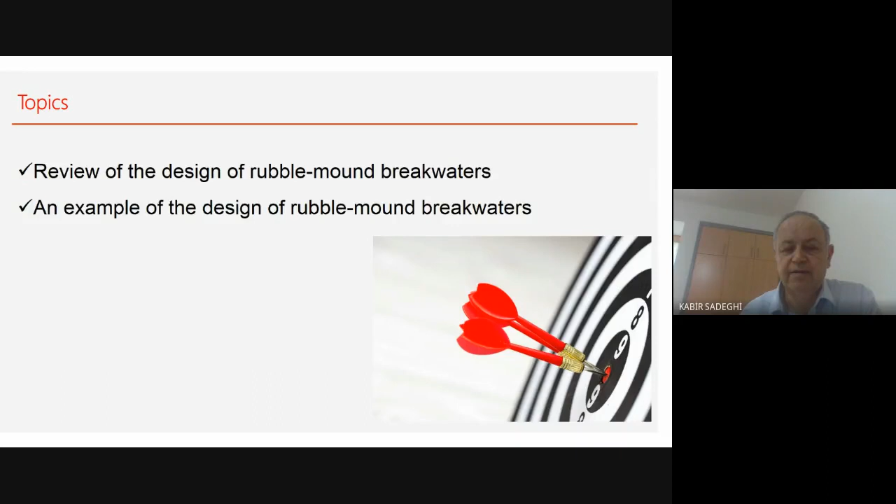First, let's see the overview. As I mentioned, the Rubble-Mound structures or Rubble-Mound breakwaters are the most commonly used breakwaters, and because of that, we see the design of this type of breakwater in this course. We had, for example, the conventional Rubble-Mound breakwaters that we are reviewing now, and there is another method that is berm breakwater, or that's formed by the waves. That's a new approach given by Professor Van der Meer. It's something about perhaps 25 years that this other method was offered. Therefore, we focus here on the conventional Rubble-Mound breakwater design.

The conventional Rubble-Mound breakwater consists of a core, which has a large volume, and at least a filter layer, and also an armor layer. The armor layer protects the breakwater against the wave. The role of the filter is to protect the core from being washed or scoured by the wave through the armor layer. The material of the armor layer is the biggest size, and the filter layer material size is bigger than the core but less than the armor layer.

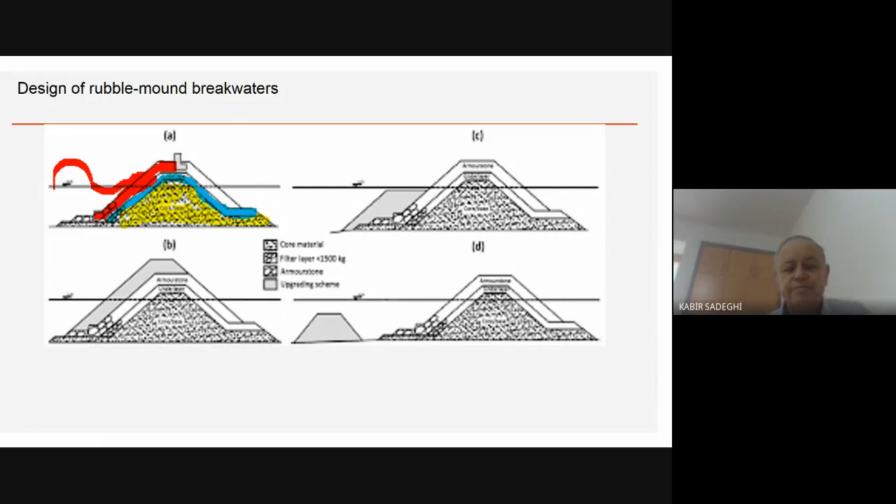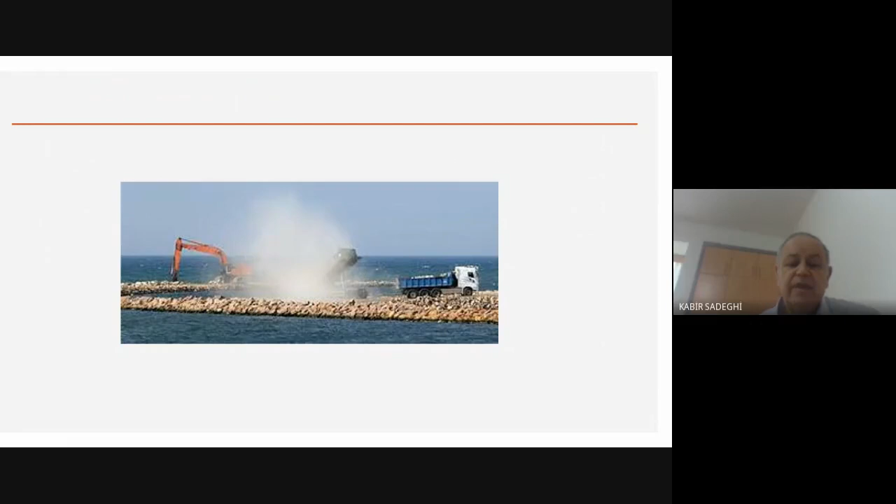Here in this slide we see how they construct the breakwater from land. They use dump trucks and cranes and grabs to handle, transport, and place the armor layer, the filter layer, and dump the core material by dump truck.

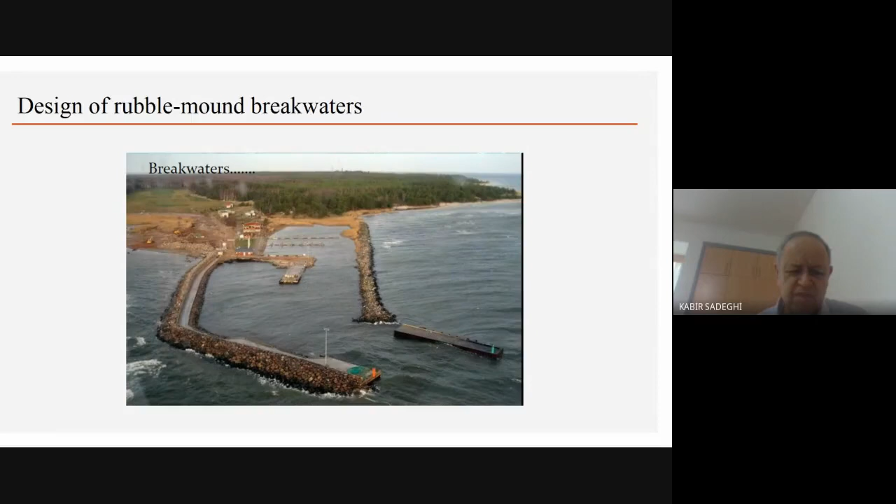Here you see the plan of a small harbor that uses the Rubble-Mound Breakwater structure type. For example, here you see the armors, they are made of stone. Here you see some other armor type, which is concrete, and it is tetrapod.

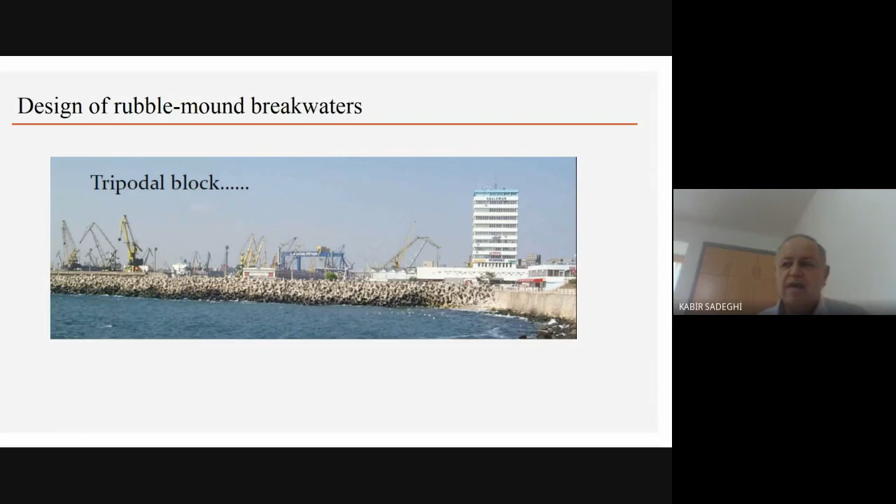Now we go to see the design of the Rubble-Mound Breakwater. For the design, we use the Hudson formula. The Hudson formula is an old formula, proposed perhaps more than, I would say, 70 years ago. They modified it a little, but actually the main skeleton of it is still there.

In this formula, we calculate W, which is the weight of the unit armor. And in this formula, we use WR, the unit weight of the armor layer. If it's stone, it's something between 2 to 3. If it's concrete, it's something between about 2.4 to 2.5.

Again, the most important parameter is the wave height. We have different wave height categories. For example, we have significant wave height, we say H1/3 or H33%. Previously, they applied significant wave height here, and then I think it's more than 20 years that the code was changed and they apply H10%, using a bigger wave height.

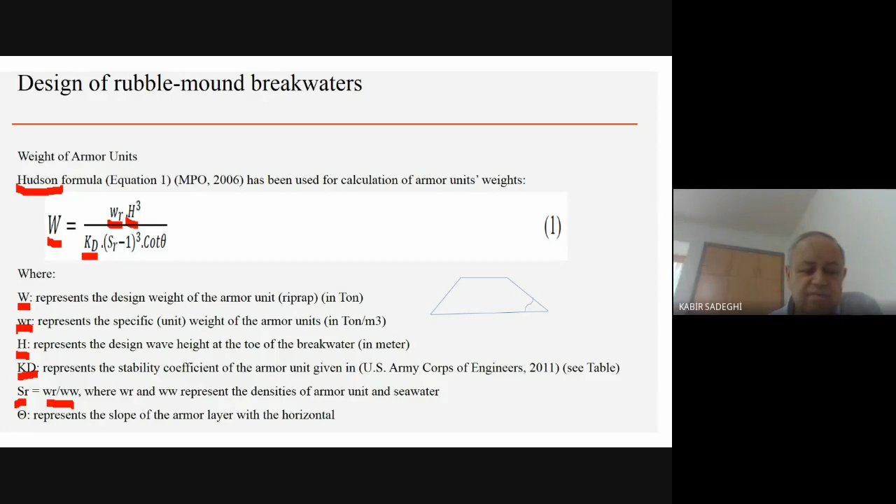And there is theta. Theta is the angle of the slope section of the armor layer. Let me show you in another slide. Yes, here if I show you, theta is this angle, the angle between the armor layer and horizontal.

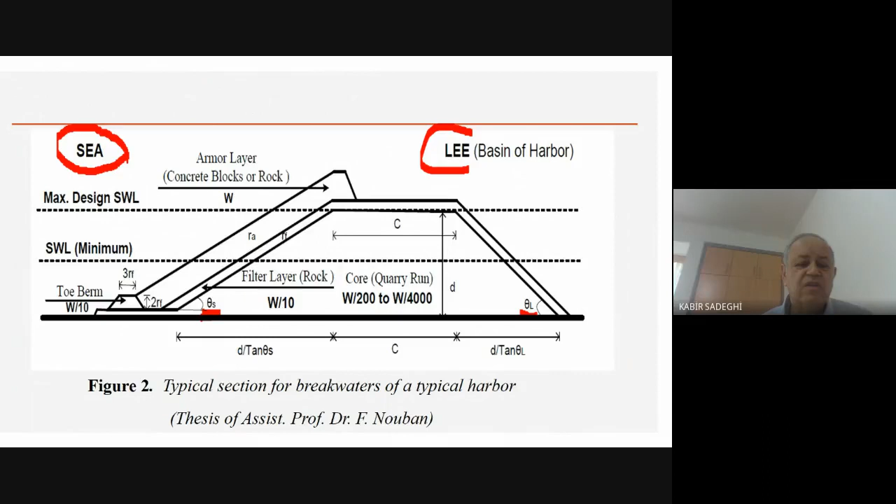And on the other side, we have the lee side, when this is the harbor side or lee side. The other one is the sea side, facing the sea. Therefore, we have lee side and sea side. You see that on the side of the sea, or seaside, we need armor. But on the side of the lee, we don't need armor, a filter may be enough. Therefore, we'll see later how we design that.

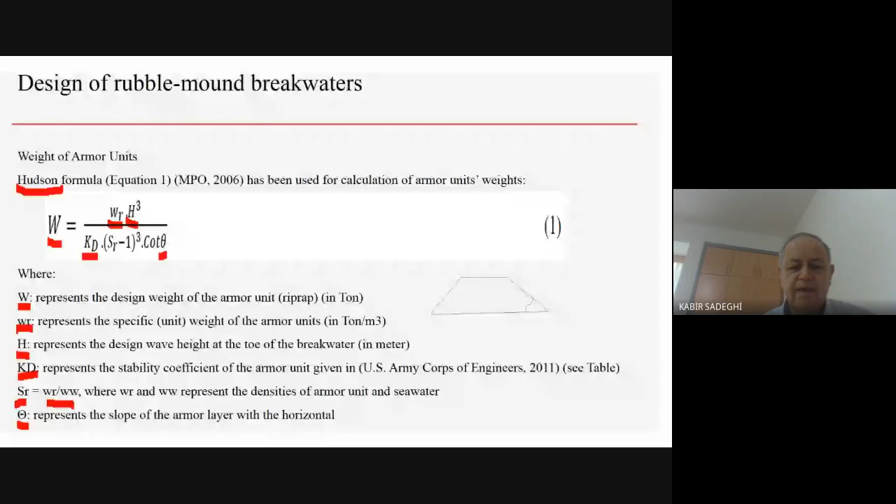Now let's see what is KD. KD is given by the US Army Corps of Engineers, and this is summarized here, based on different tests.

You see the first column, the armor units are listed: different things. We have quarry stone, tetrapod, quadrupod, tribar, Dolos, modified cube, hexapod, and many other different models.

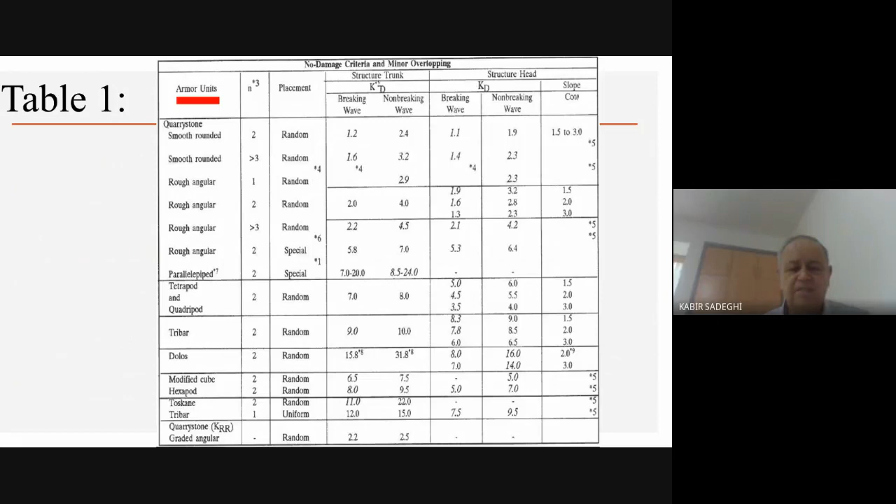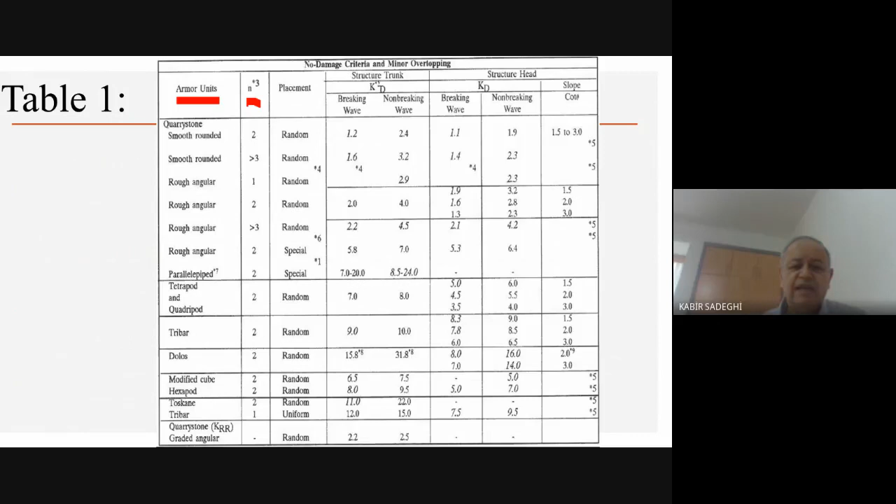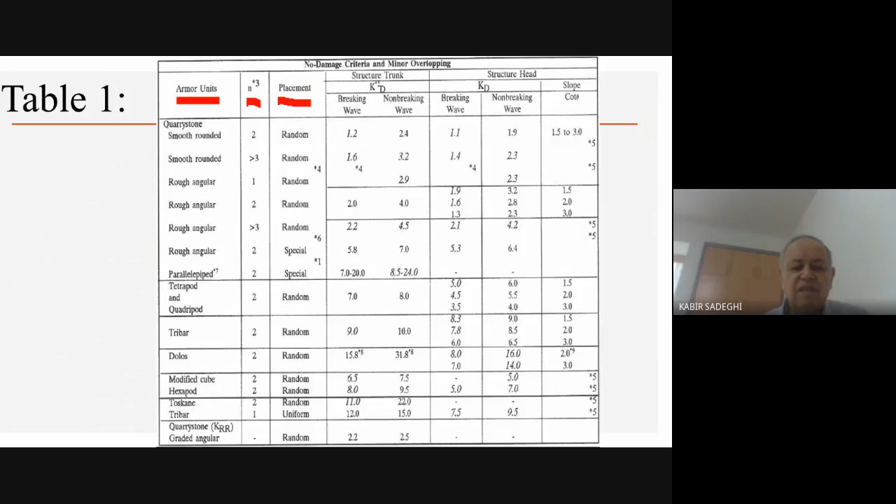The second column shows the number of layers. How many layers do we have? For example, in the armor layer, perhaps we have 2 layers; in the filter, perhaps 2 or 3. We can change the size of them as well. Then there's how they are placed - randomly or specially placed. It depends.

You see we have 2 different columns here, one from here to here, and the other from here to here. What's the difference? The first one gives values for the trunk of the breakwater, the second gives values for the head of the breakwater. The head should be heavier and stronger, because sections in the trunk are supported by other sections, but the head is supported by nothing. After the head we have water, and this is subjected to very strong waves.

You see here the last column - for different tests they use different slopes or angles. Cotangent theta is the slope, and theta is the angle we discussed. For example, for rough angular stone we have 1, 2, 3 different slopes, and the results are given. For tribar, everything, different slopes are given here.

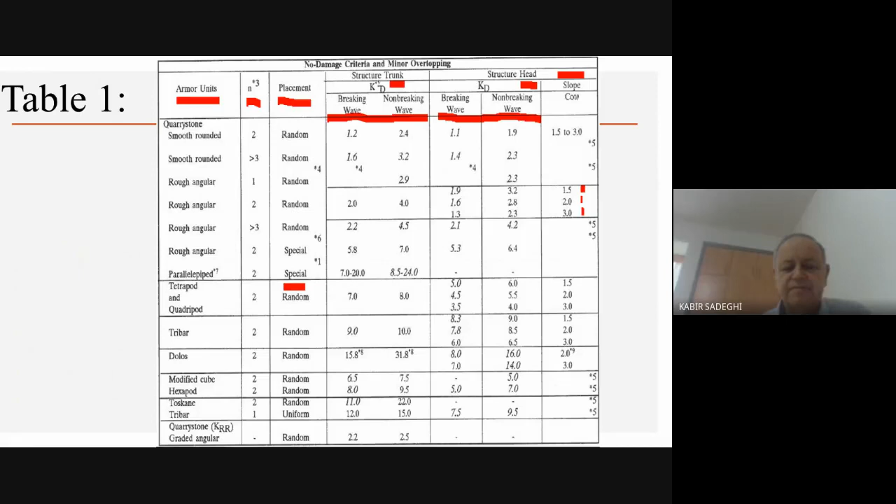We saw that we have different types of armor units. The KD of Dolos is very high, very good and used. We have tetrapod, which is common to use. We have tribar, common to use. We have modified cube and other types.

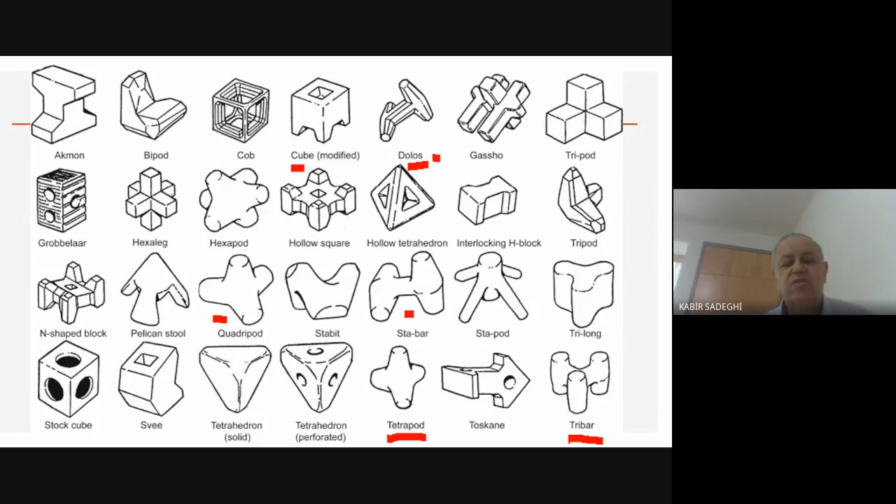Here we have quadrupod, and Sta-bar has a very close shape to the Dolos. There are some famous types, and there are not - why are they different types? Because if you want to use them, you should pay the patent fee. Some people prefer to use their own, or they generate more and get a patent.

Now let's see the overall concepts and equations for design of rubble-mound breakwater. Here we see how we calculate the weights of core, filter layer, and armor layer. All these values are given according to the recommendation of the US Army Coastal Engineering Center. We have SPM, the Shore Protection Manual, and more publications from there. You can search the internet, buy some of them, download some, and use them.

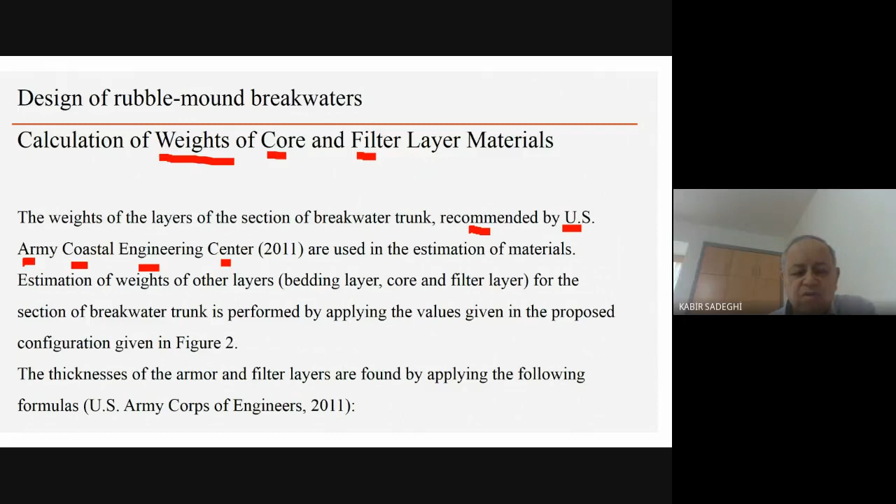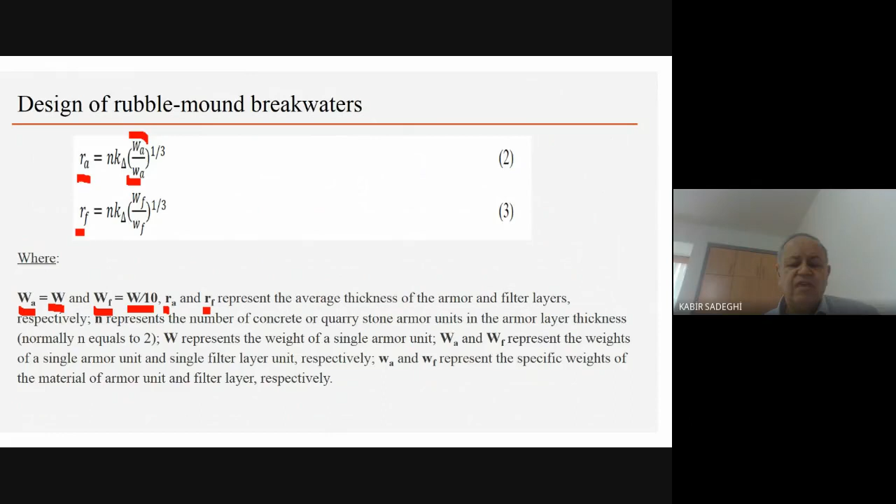We calculate all of these values and sketch the section of the breakwater. This is a typical section of a breakwater used for harbors. This special sketch, with the slopes and details, is given by Professor Dr. Nouban in his thesis - he used that and calculated the materials and a lot of things based on this section. We use that one.

It's very practical. As I mentioned, on the lee side, in the harbor, we don't have the armor layer; on the sea side we have the armor layer. A very important part that has been emphasized recently, for more than 25 years, is the berm. When you put a berm here, it stabilizes the armor layer and the breakwater overall.

The weight of the berm is W over 10, like the size of the filter layer. For the armor layer, the weight is W, shown here. For the filter layer, as recommended by the US Corps of Engineers, this is W over 10. But for the core, which is the main body of the section, it's between W over 200 to W over 4000.

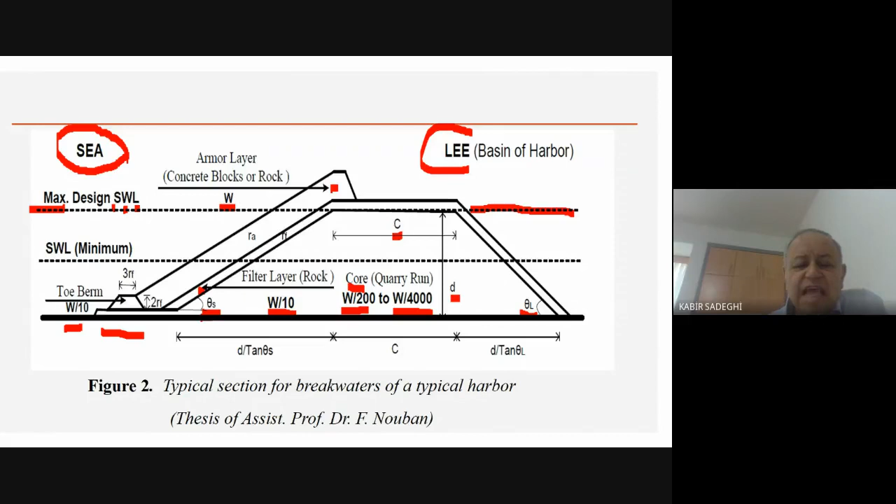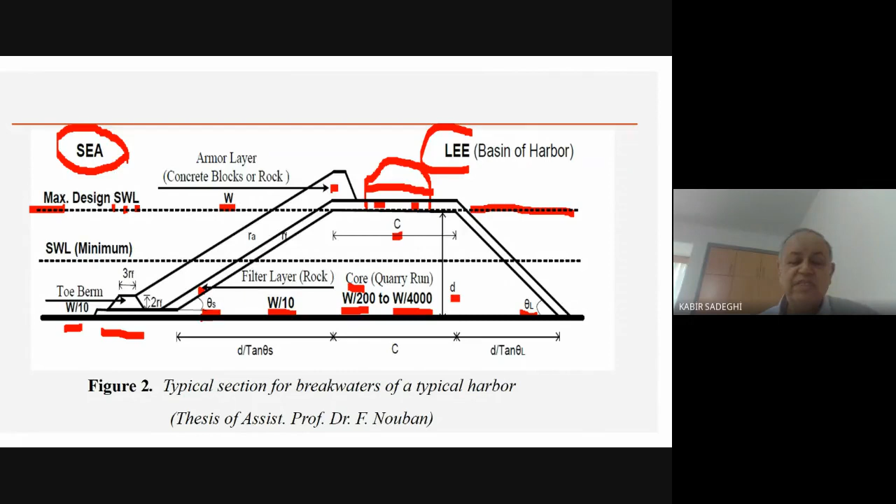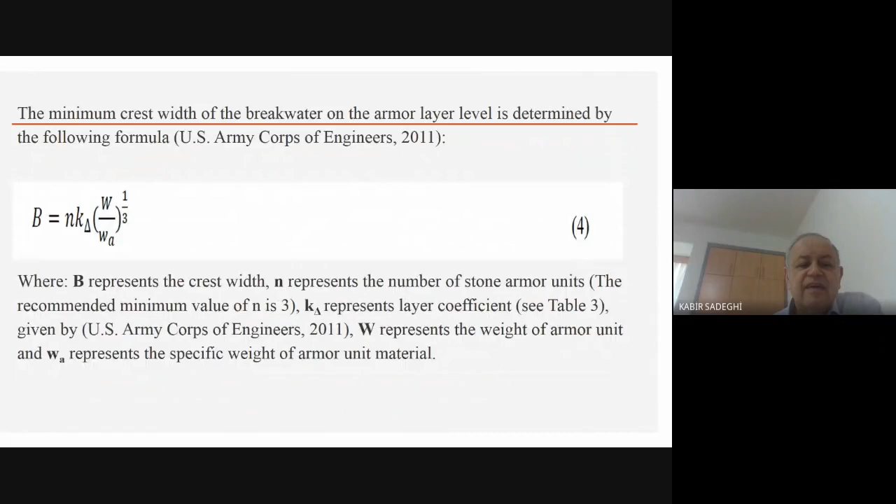The minimum crest width, as I mentioned, is shown in the figure by C, but the US Corps of Engineers give it by B. It has a formula like this: N, the number of layers in any layer, in armor or in filter, and then K delta W, this is the armor layer unit weight of 1 unit of that armor layer, total weight of 1 unit, and WA, as we discussed, is the unit weight of the material of armor. Therefore, N is the number of armor layers. Perhaps the armor layer itself has 2 layers, 3 layers, but mostly 2 layers or 1 layer.

Therefore, as I mentioned, we use K delta here, but we didn't see what K delta is. Let's see what K delta is. K delta is given in a table here. You can see the value of K delta. This is corrected, I corrected it. It was KD, I corrected it to K delta. That's correct. Therefore, it depends on the armor layer type, the first column shows that.

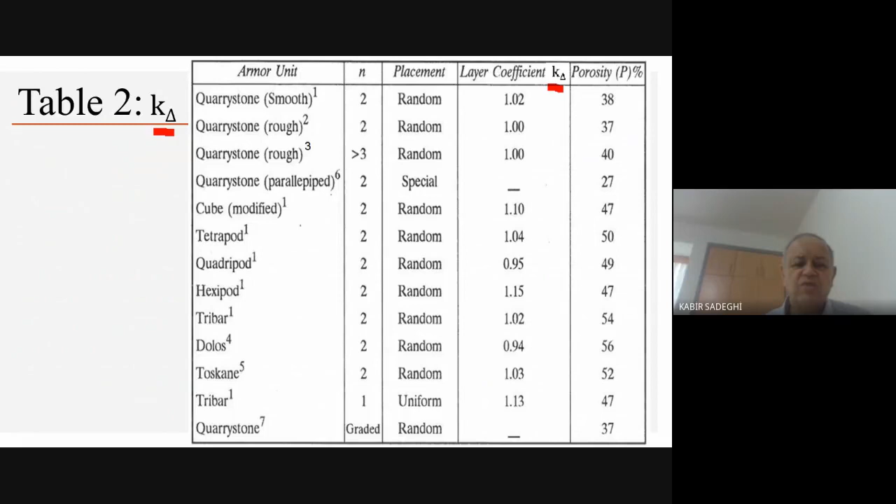As I mentioned, we have quarry stone, we have tetrapod, quadripod, hexipod, tribars, dolos, etc. And the second column gives us again the number of layers in that layer, the placement type, and finally we find K delta.

And we can find 1%, for example, for porosity of the layer. In the armor layer, you know, we have stone, but between the stones there is air, there are gaps, there are voids. It calculates how many percent void there is. Because of that, if we have the length, height, and the width, we have total volume multiplied by the percentage of this void. We see the empty part, and 100 minus 38, for example, percent gives you the full part, and you can estimate the quantity of material.

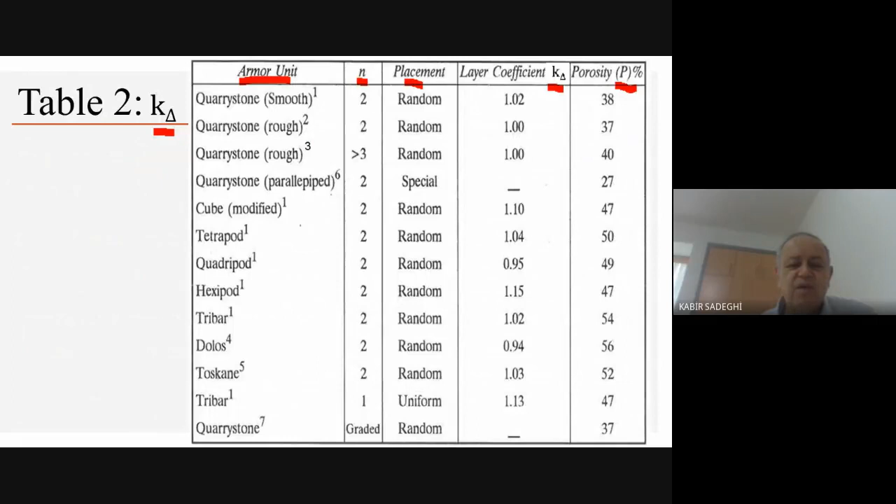In this table, you see there are some numbers, 1, 2, 3, 4, 5. These values just give some more information about who has given that data and how, etc. It's listed here.

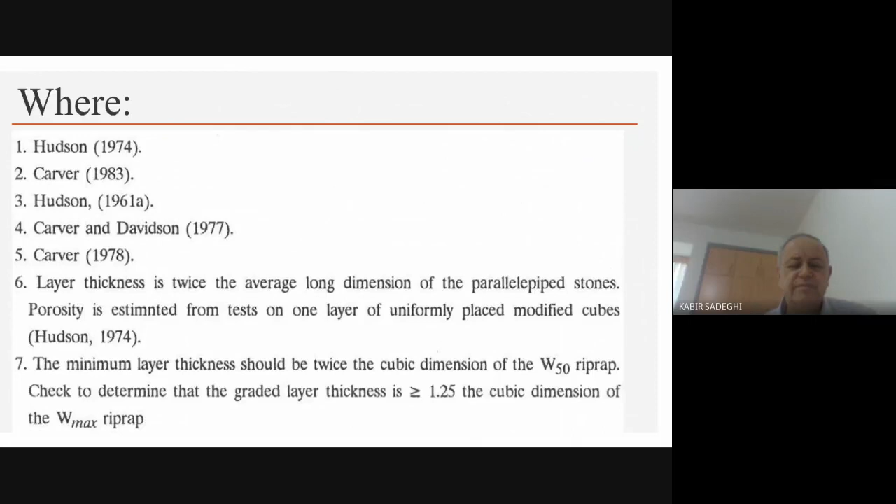Actually, we accept that in the normal case, up to 5% damage, we accept that. During the operation period, we repair that. For example, one wave comes after 10 years and moves some stones or armors, concrete armors, everything, we can replace that, we can repair that. Sometimes at the beginning of a project, we don't have a lot of money. You say okay, we don't have money, let's apply smaller sizes of armor. And if there is damage, we repair during the years, 1 year, 2 years, everything, we change some of them.

Some breakwaters even have permanent repairment. They change this, a wave comes and destroys another part and then it's replaced, because they divide the budget in two parts, one at the beginning, one in the operation period. If you put a big budget at the beginning, you need less repair and less budget for repairing. Inversely, if you put a lesser budget, you need more repairing budget later. Actually it depends on you.

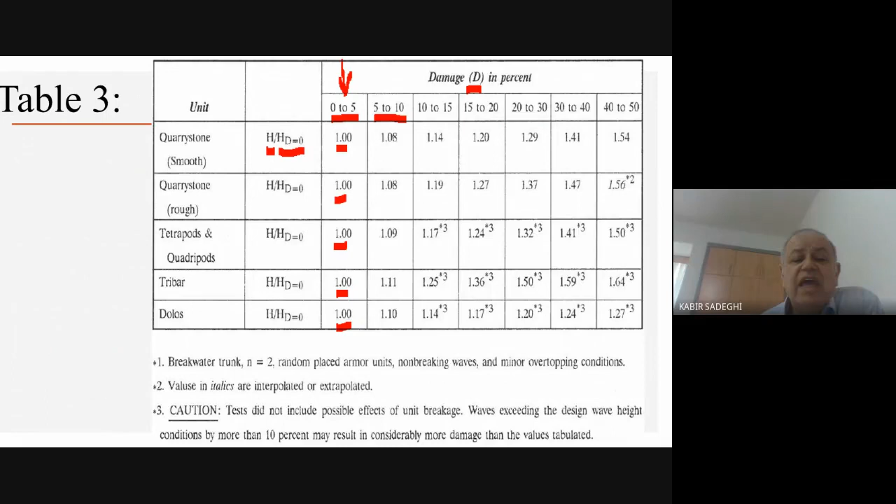Okay, if we accept 5 to 10% damage, we calculate H over HD, which gives 1.08. Therefore, if your H was 5 meters, using 1.08, you find what is HD. Perhaps it's 4.8, I don't know. We have one example, we'll see that later. For any other case, you calculate and compare the design H, and when it meets the design H, there is no damage.

Therefore, in the formula, H is considered the wave height in calculation of the armor unit. In the calculation, when you design, this is, for example, the H you apply to the design. Let me change the color. And HD equals 0 considers the wave height with 0% of damage.

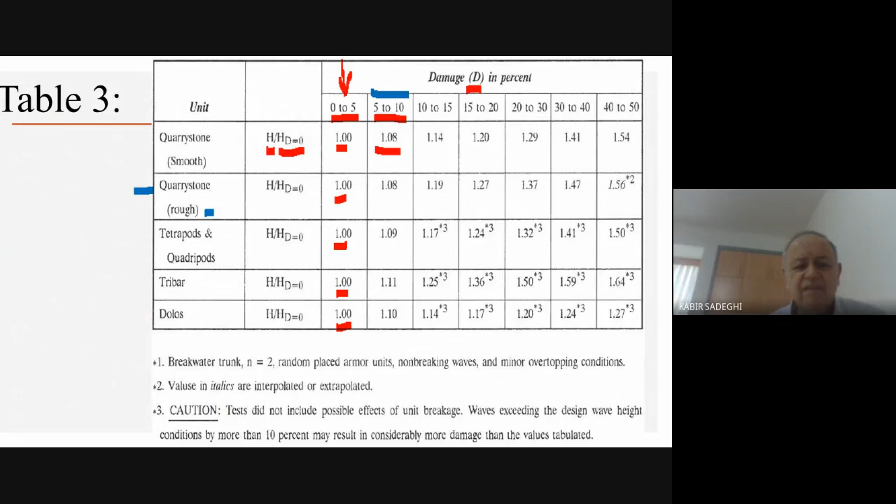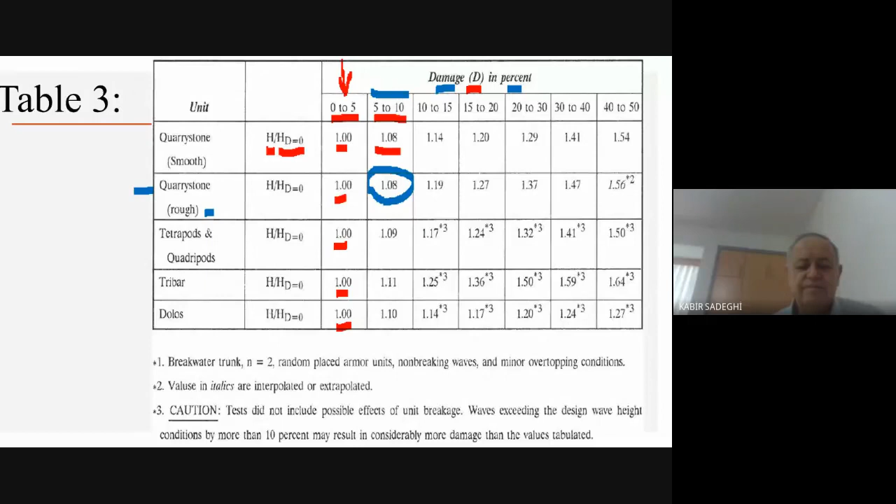Let's go and see. Therefore, the condition is quarry stone rough, damage 10%, and that's what we have. Quarry stone rough is the second one, this one. And damage 10% is the second column here. Therefore we find from that table 1.08. For quarry stone, the corner is rough, and we accept up to 10% damage, we find a value of 1.08. Because of that, we have one value of 1.08 here, found from that table.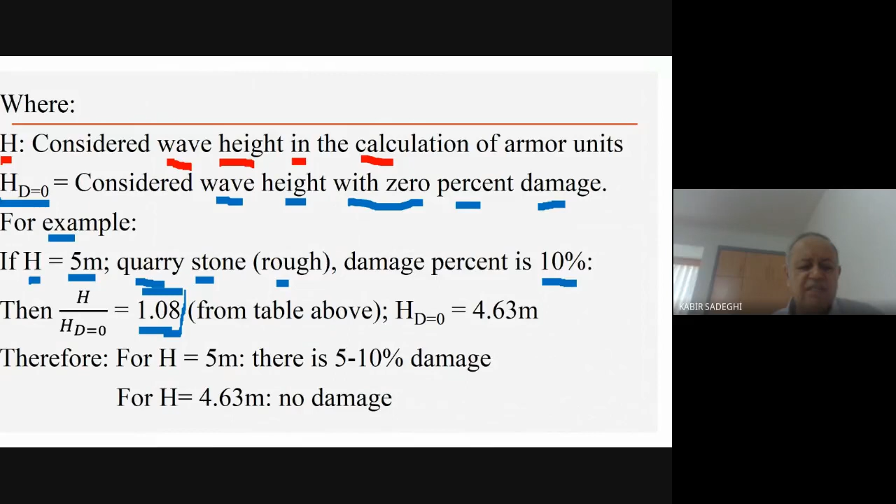Therefore, if you put H equals 5 here and 1.08, we find HD equals 4.63 meters. Therefore, we can say when we have H equals 5 meters, we have a designed breakwater with 5 to 10% damage. If we don't accept any damage, we should not design for 5 meters. For the no damage case, we should design the breakwater for a height of 4.63 meters. It means less height, less damage; bigger height, more damage. Therefore, that table gives different values.

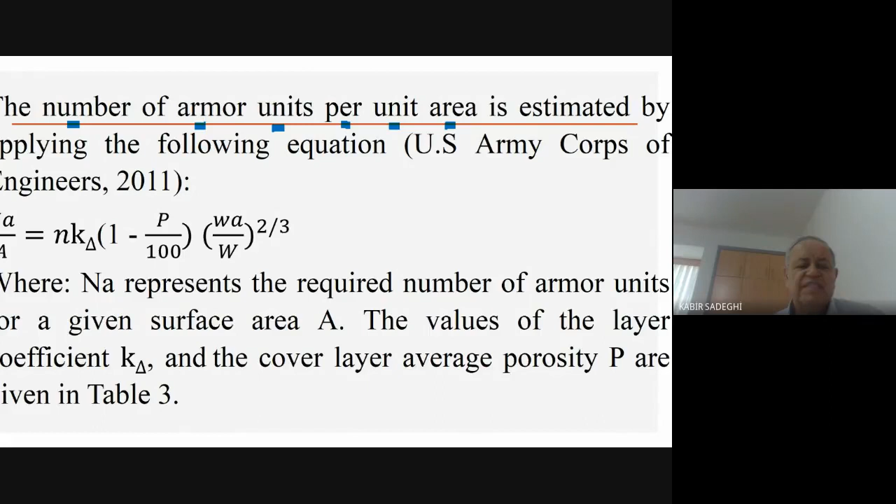In this table, we see the density of the armors on the land - how many per square meter we have. We see the number of armor units per unit area are estimated by the formula given by U.S. Army Corps of Engineers, 2011, in CEM, Coastal Engineering Manual. Therefore you see that NA, in this formula, we should find NA, or NA over A.

This is the density - N, the number of layers of armor, if you want to know how many armor units, the number, we should calculate from this formula. And you see here the porosity percentage we have - do you remember the first one was 38%, 38 over 100 - and WA over W, this is the unit weight, and this is the armor unit weight, total of that. NA represents the required number of armor units for a given surface of area A. The K delta layer also is used, and P can be calculated from the table that we saw.

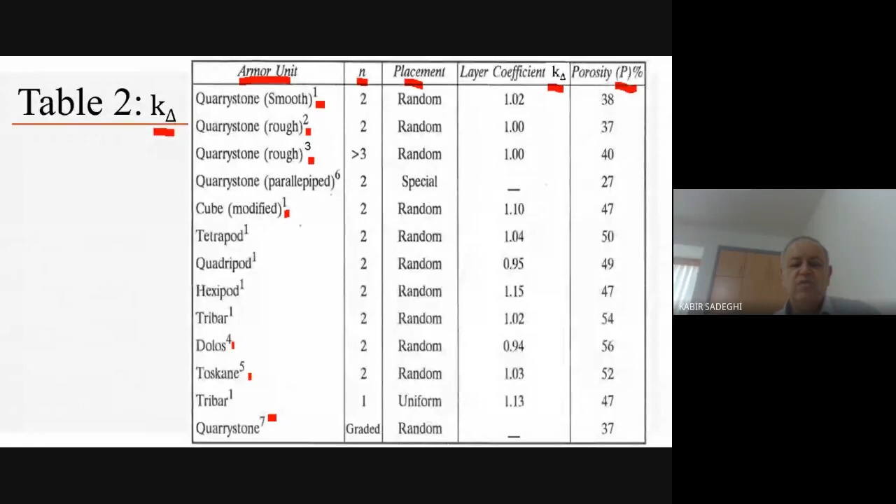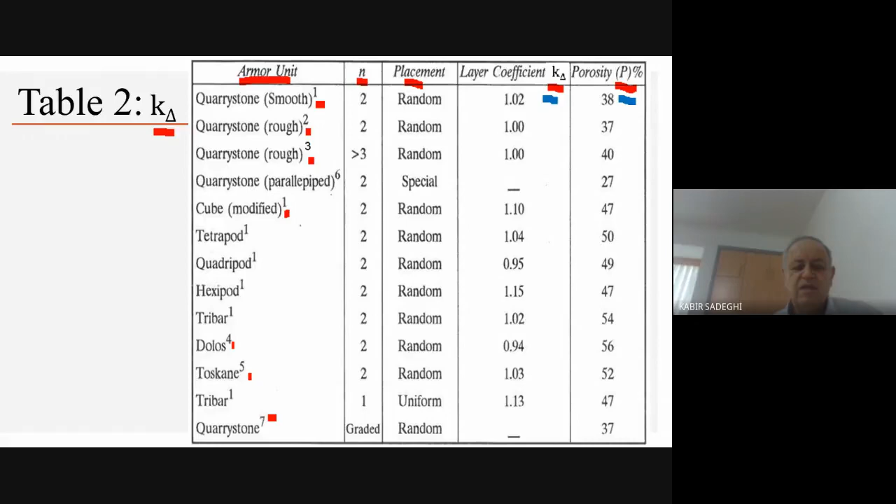Now let's get back to the table. I'll show you again - here, no, table 2. This is table 2. We can find K delta from here and porosity P from here for different cases. So this is table 2. This is table 3. We can find - I think, change this one - this is table 2 actually, not 3. I will change the slide later. We saw this one. What was that? Perhaps it was right. Let me see - no, this is here as well. This is table 2 as well, because I changed the number of tables.

And now let's see one example. Find the weight of armor units, filter layer units, and core unit sizes for trunk and head of a breakwater. You should design first for trunk and then for head. The difference is mainly that KD values are different for trunk and head, and also the head is symmetric - on the lee side and sea side they have the same form. Actually, on the lee and sea sides they have armor on both sides, even on the crest.

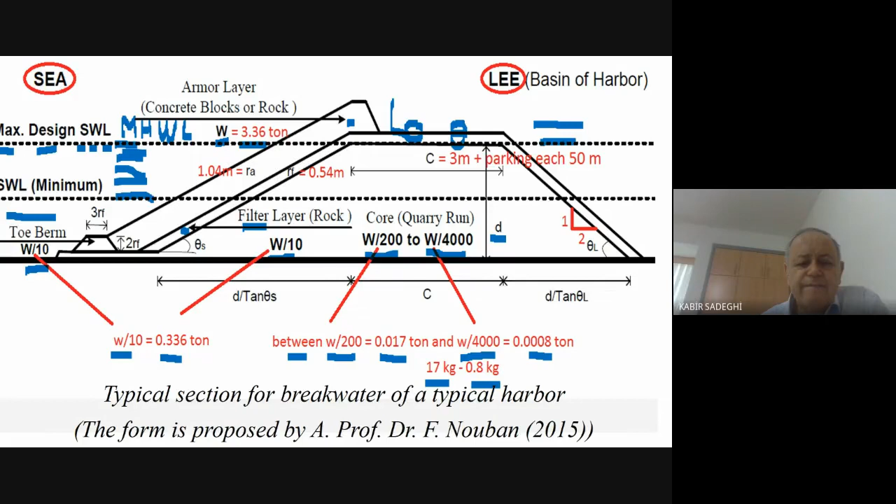High level is higher than the design one. It means when a dump truck wants to go here, for example, the dump truck goes here, and perhaps in 1 month, 1 day, or 5 hours, 2 hours it cannot work because the water is higher than that level. But it doesn't matter, we cannot go to the low water level design, never can they go there.

We use that. Why? We can design the high level of the breakwater to the highest level, but it's not economic. If D increases, the value of D increases, you see the area of the trapezoidal core and the material increase very high. It's sometimes power 3 of that, or at least power 2. We should calculate that. Therefore, we don't increase the level of the crest of the core too much because it's not economic.

We accept that during a 1 month construction period, or totally if the duration is 1 year, we accept totally some 5 hours, 2 hours we cannot work. Otherwise, we should pay a lot for material and even the work would increase. Therefore, we calculated D and C.

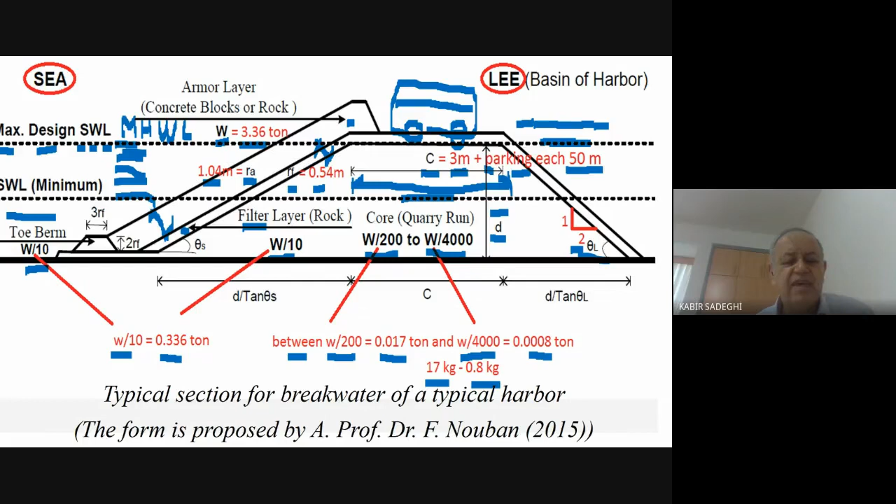And after that we calculated the RF. When we sketch the section, we should consider this is RF, from here to here. And don't forget, we calculated, you remember, cotangent theta in calculation we consider 2. So if this is 2, this is 1. Here we should have the same. If you measure the angle, this is 2, the other is 1. It means cotangent theta is 2.

Overall, we have designed the breakwater. The berm details, the height of that - it is 2 times, you see here, the berm height is 2 times RF. And the width of that berm is 3 RF.

Therefore, for the toe berm, the weight of material, it was W/10, it was 0.336 tons. The height of that, as I showed here, it is 2 RF, because RF was 0.54, therefore 2 times that is about a little more than 1 meter. And the width of that is 3 RF, it means something more than 1.5 meters.

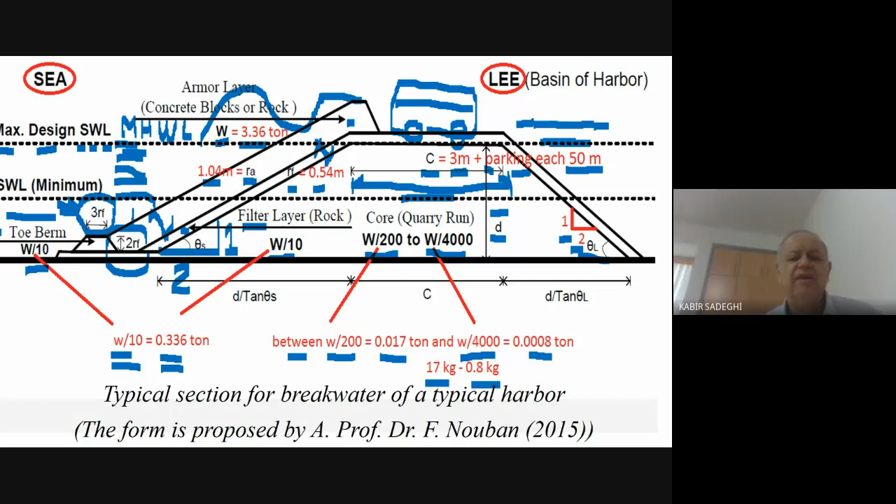Now, when the wave comes, the highest level should be protected. Here, the wave when it comes should not normally have overtopping. If there is overtopping, it should be very low. In design, in the section, you consider whether you have low overtopping or high, or what. If the crest of the armor layer is not enough to withstand the wave, sometimes we put one parapet wall here that has an L-shaped section, a parapet wall. And in this case, the wave even can go up to here as well, and then is prevented.

Therefore, don't forget, all this was about the seaside. On the lee side, we should have very small waves, less than 1 meter height. Why less than 1 meter? Because otherwise the ships cannot berth, they cannot unload the cargo from ships, and they have problems. Or sometimes they damage the jetty. Therefore, we should be careful.

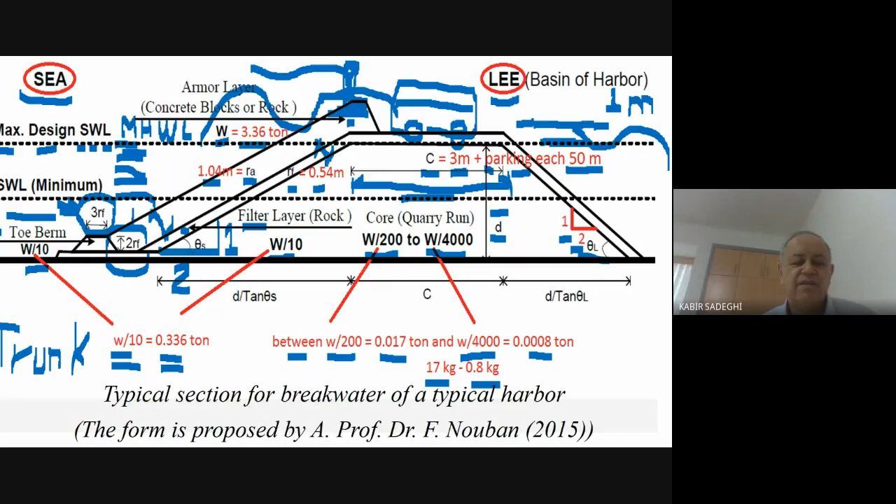Yes, now this is the section. If we review again, you see the W, the weight of armor, thickness of armor RA, W/10, the filter unit weight and toe berm unit weight, and RF, the thickness of the filter layer, 2RF, the height of the toe berm, 3RF, the width at the crest of the toe berm, and we calculate this.

So C, we have considered the minimum 3 meters. If we consider 3 meters minimum, we should apply parking each 50 meters. That's a must. Either for C we consider at the beginning 7 meters, which needs very big material, or it's better we consider C as 3 meters and then put one parking each 50 meters along the length of the breakwater. During the operation period, for example, we need to go with car or truck on the breakwater, but at that time there's not a lot of traffic going and coming. We go there, prepare, and come back. Therefore 3 meters is enough. If you have a very big harbor with a lot of traffic on the breakwaters, you should put 7 meters. Otherwise, 3 meters plus parking at each 50 meters is enough.

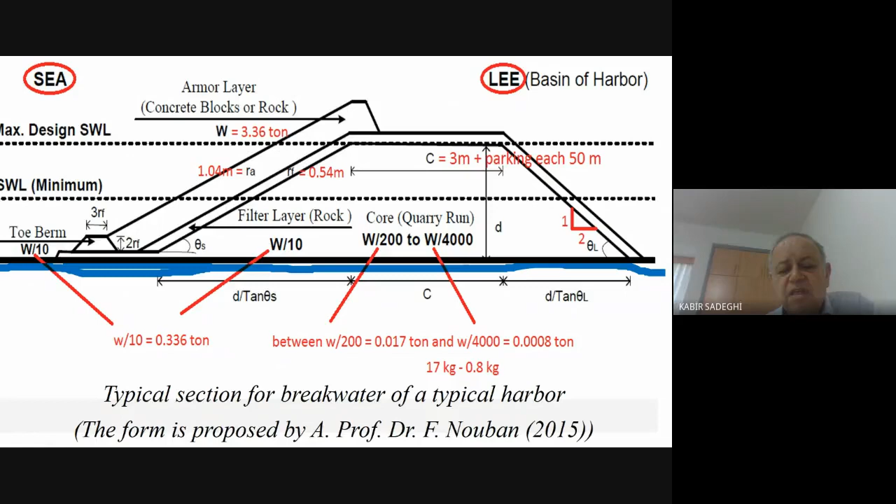The other thing I should mention is that sometimes they use one layer here, just one layer, made of material called geotextile. Imagine you put some very strong cloth here, and then when you put the material on top, it prevents it from sinking into the mud. Therefore this is geotextile, they use it here.

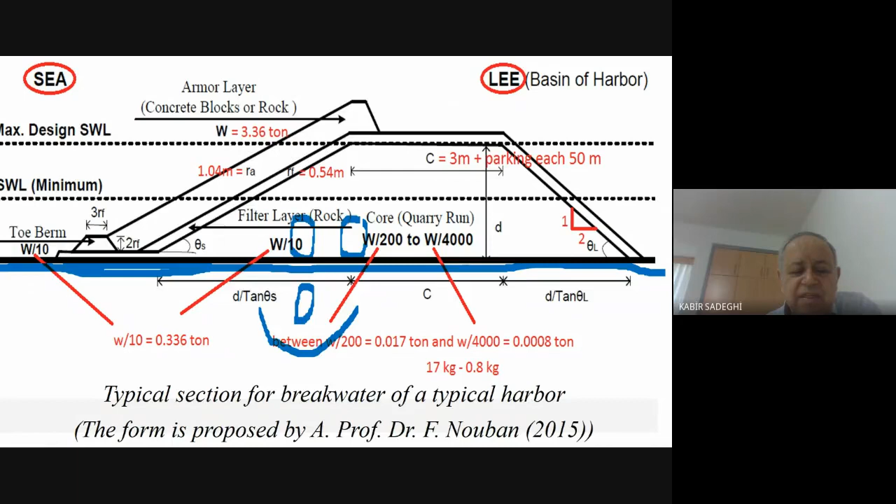Therefore, either they improve the soil under the underlayer of the breakwater, sometimes by injecting some material there, or by replacing it, or by using geotextile under them. These are the normal methods in practice.

Now let's go and see the head — this is head, sorry, it should change that. Let's see the head, design of head.

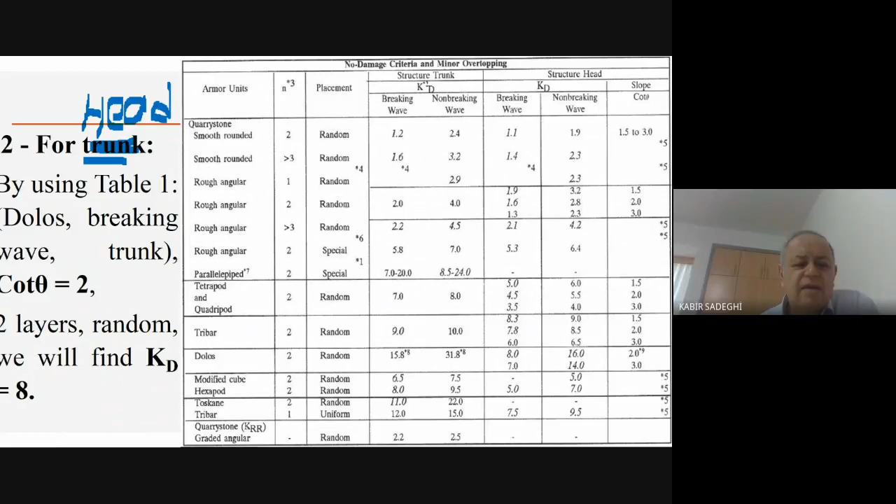For design of head, again everything is the same. Why did it come here? Let me see — it was not replaced, the last slide is the old version, sorry. For the head we have the same table.

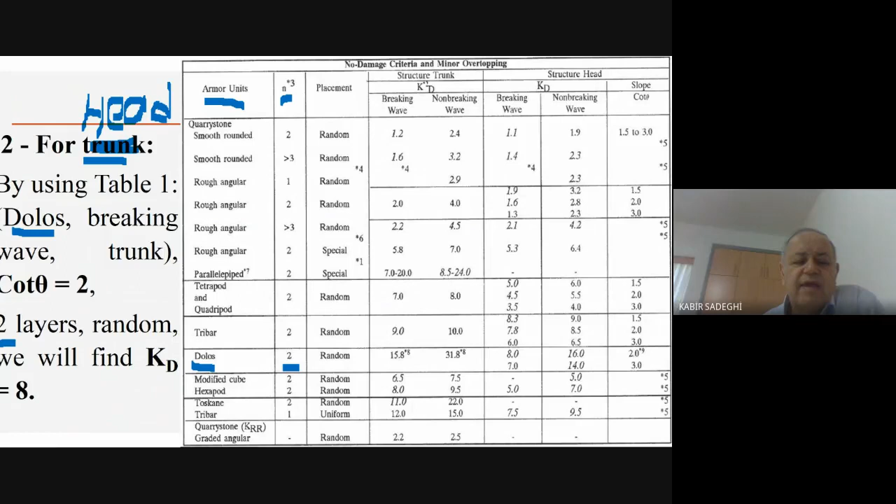Again we have Dolos. Therefore here, armor layer is selected as Dolos in the first column. We have 2 layers in the armor layer, so N is 2. We have the method of placement, random method, so we are in the row of Dolos. Also, this is the head, not trunk. Therefore we go here and see the head.

When we see the head, let's see the condition of the wave. It's a breaking wave, so we select breaking wave. From here we go down, and horizontally we continue to here. Therefore in this column we have breaking waves at the head, from here.

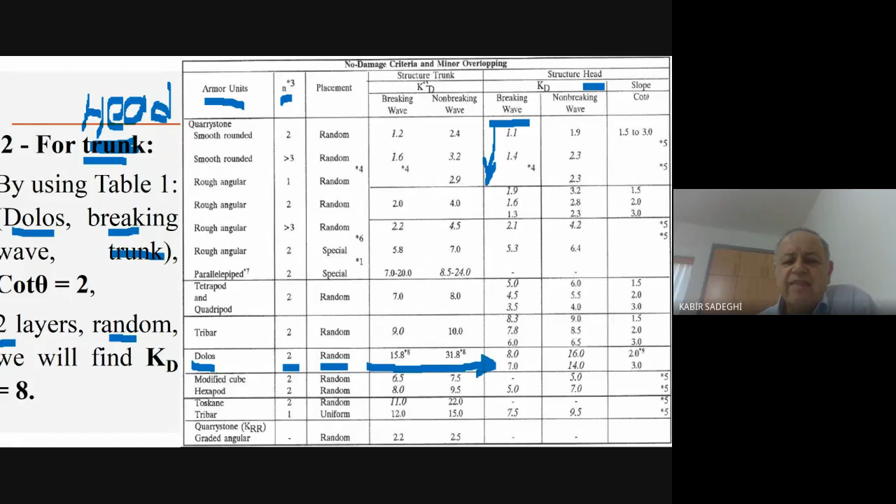And from here for Dolos, we find two values, one 7 and one 8. Which one depends on our cotangent theta, the slope, which is 2. The last column is the slope, cotangent theta. You see this one is 2. Therefore from here we select this 8. So for us, KD equals 8.

This is the conclusion. And what else? The KD is different, so we design again the W/10, B, RA, RF depending on the formula. We repeat the calculation from here — just the KD is changed, the others are the same.

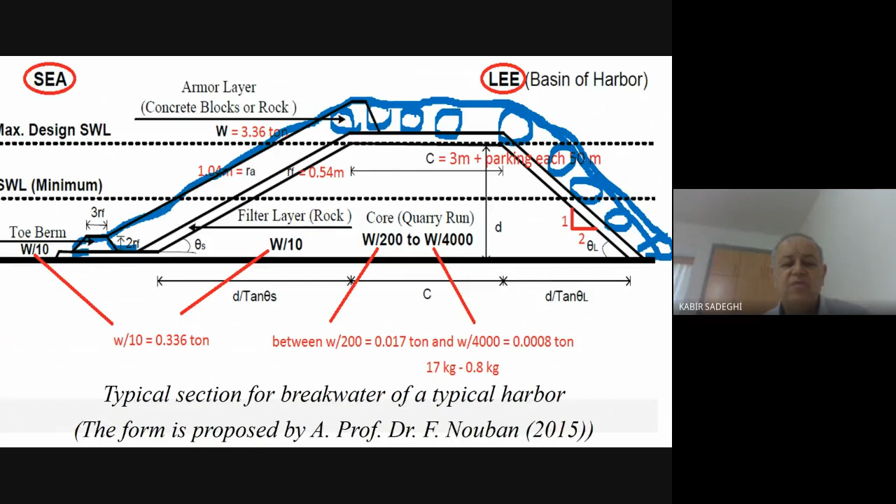Because at the head, it's not supported to the other section. They are subjected to the wave and surrounded by water, nothing else. Therefore, because of that, we should have one section like this. Let me erase this part.

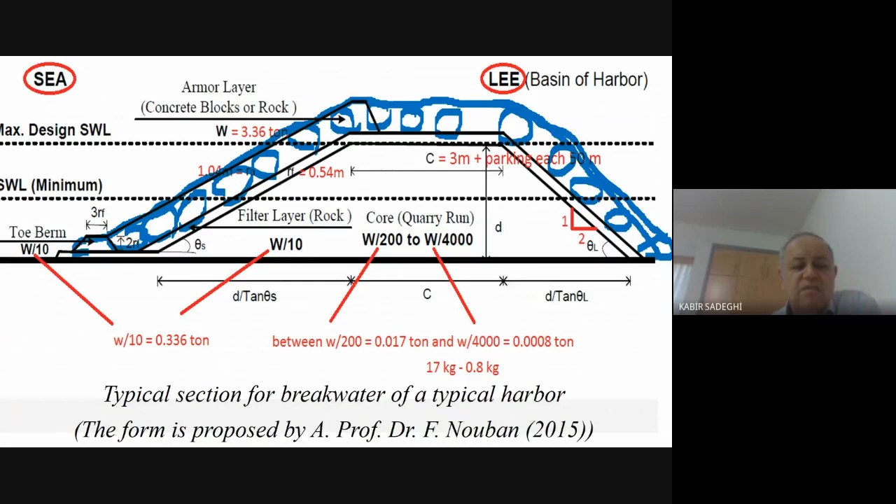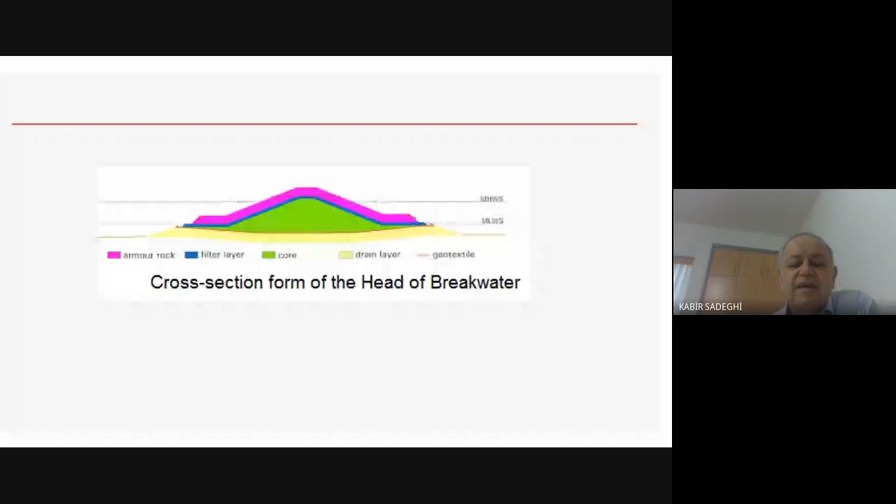I continue. At the end, for the head, as I mentioned, the cross section is symmetric. You see here, it goes and goes to the other side. You have armor layer and filter symmetry, and here.

And this is called, as I told you, let me draw with another color. There is one layer here that is shown by yellow. This is the bedding layer.

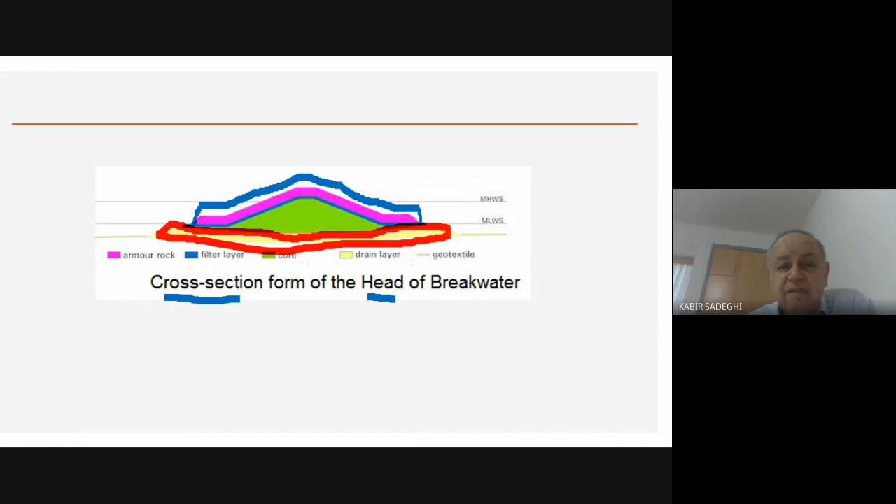What is the bedding layer? It is a layer on the soil, on the seabed, that makes a little modification to the soil. Its role is exactly like the lean concrete that you put under the foundation of buildings, for example, 10 centimeters of lean concrete under the foundation. You put one under layer here, this bedding layer or under layer.

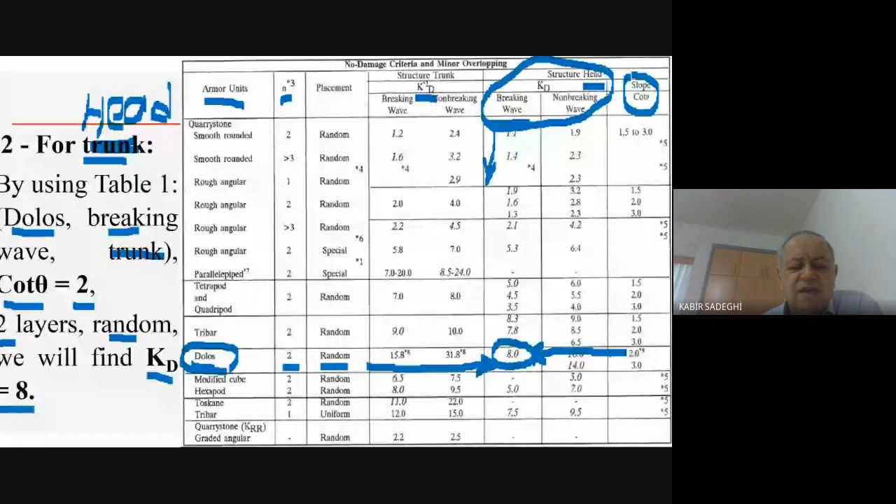Therefore, I hope you got all the things that I told you. Let me, for reviewing, go to the first slide and come back, to be sure that you got everything in the example that we have.

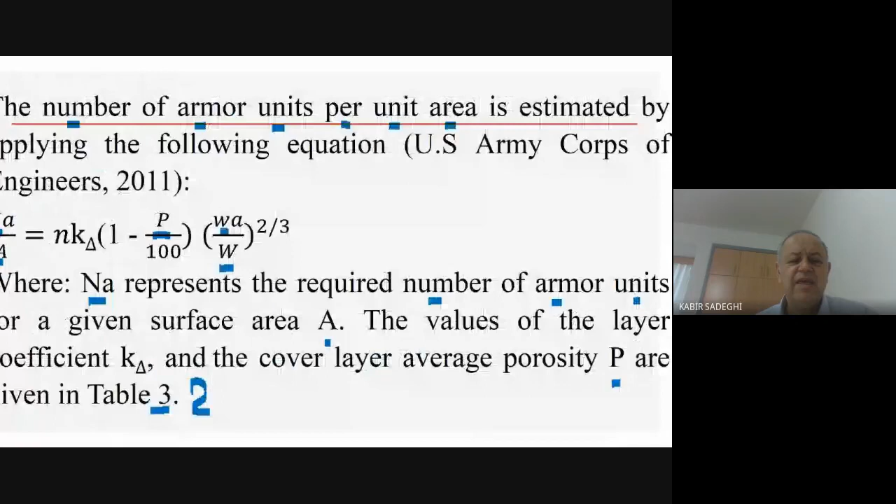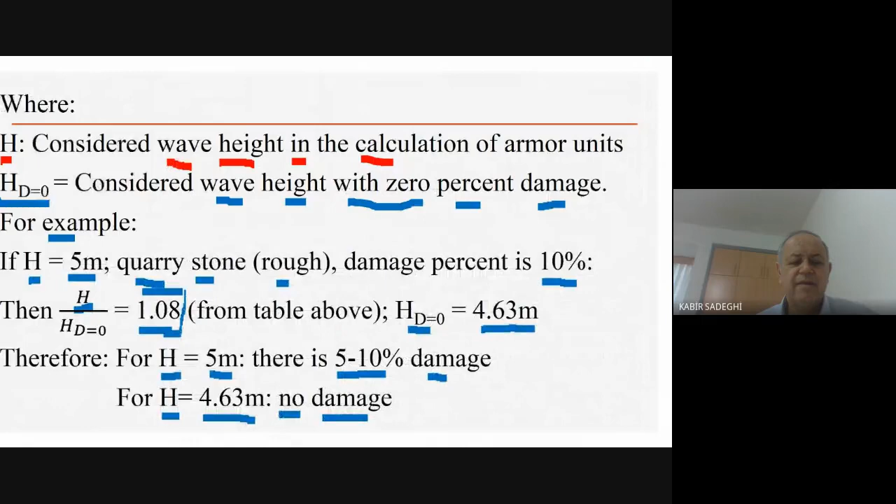In the example, they give some values: H10, the type of the armor layer, which is Dolos, is from concrete, and the unit weight is clear. The breaking wave condition, not non-breaking wave, and the seawater unit weight is given to us. Let me erase everything.

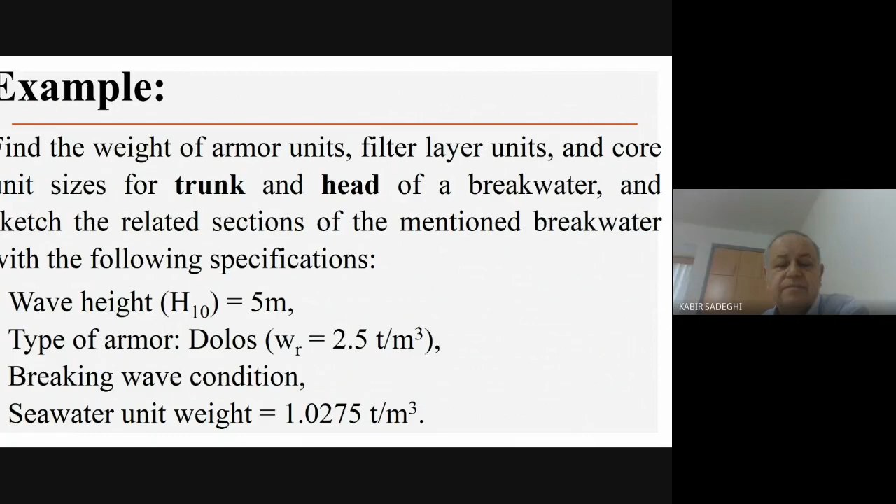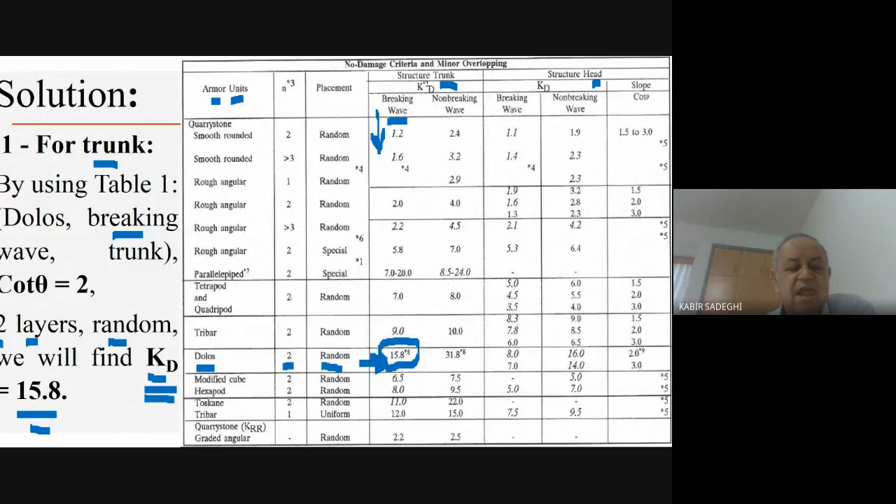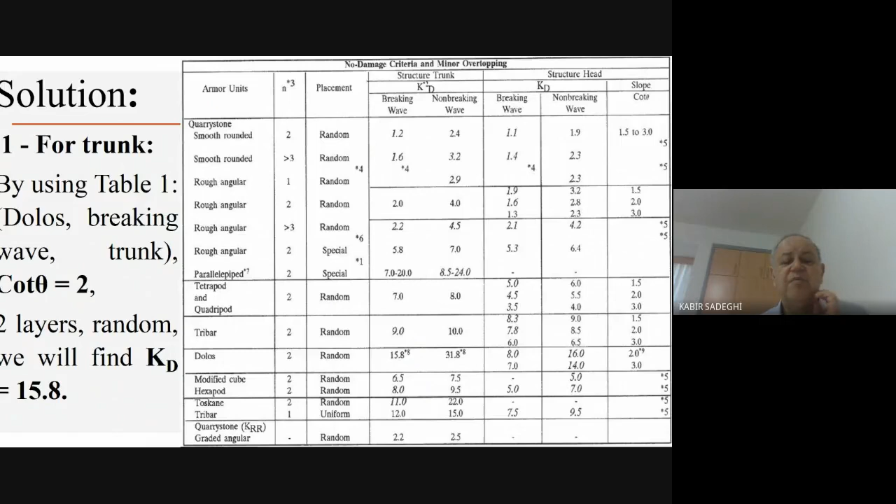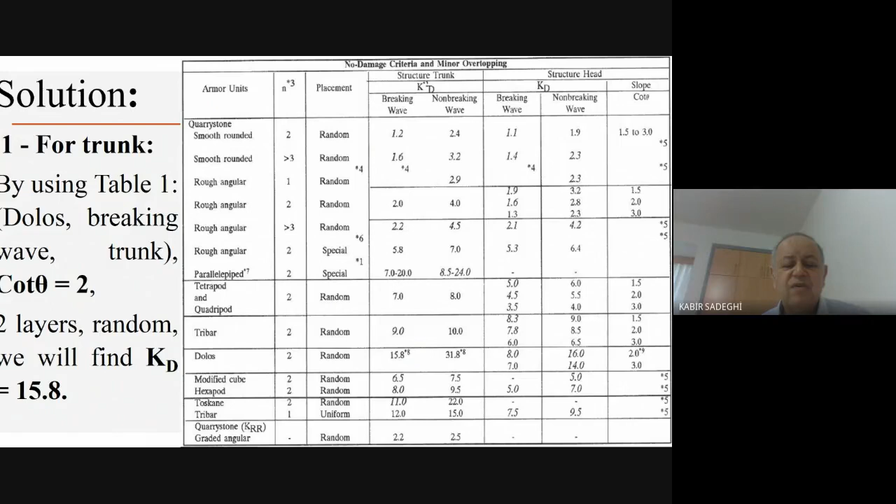And here we found KD for the trunk. You remember that we selected first the armor unit, the number of layers, the method of placement. Where is that? In the trunk. And what is the condition? Wave breaking. And we found the value for KD.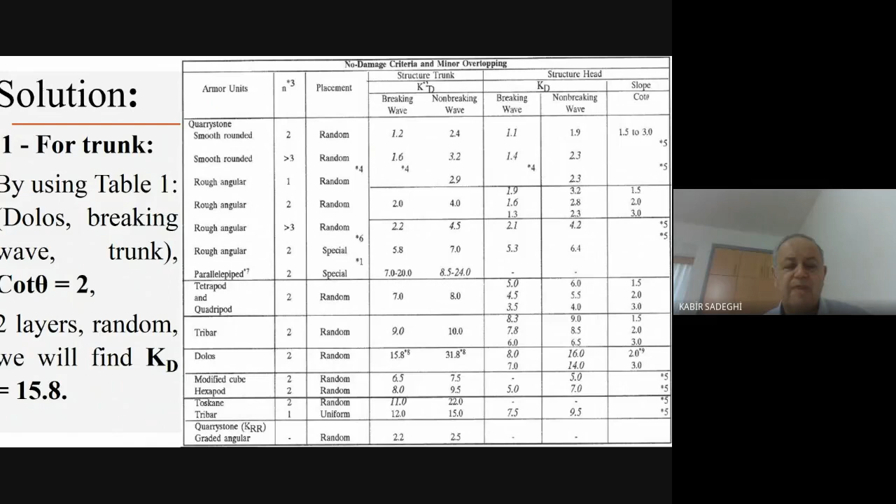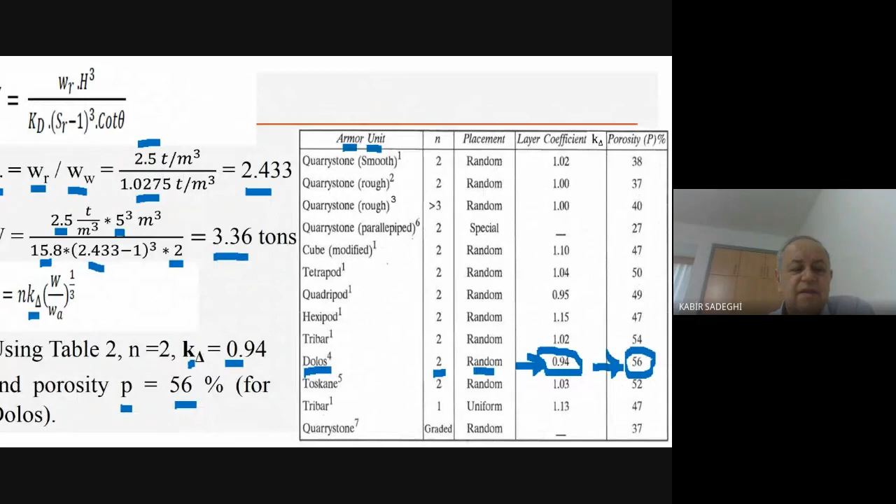Here we calculated W by applying everything that we had. KD we had, SR we calculated, the value of H was given to us, and the unit weight of the armor unit, which was concrete, we knew that. We found W. For B, we need one K delta factor that we found from the table.

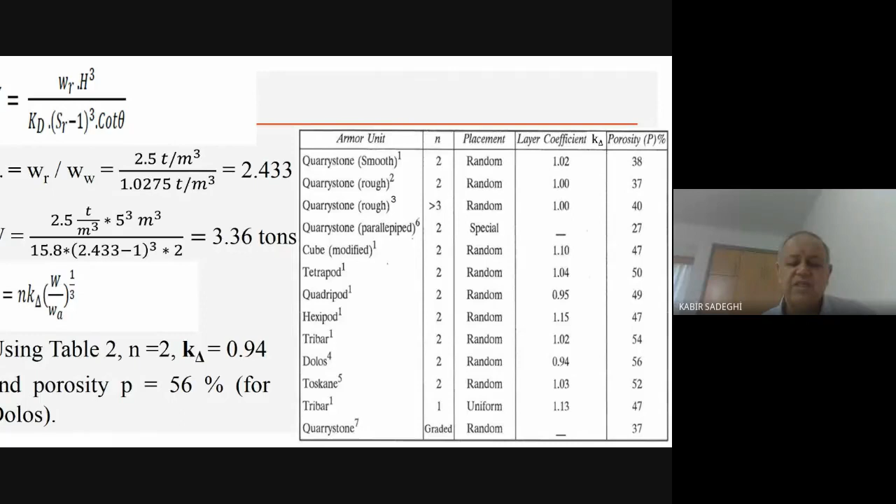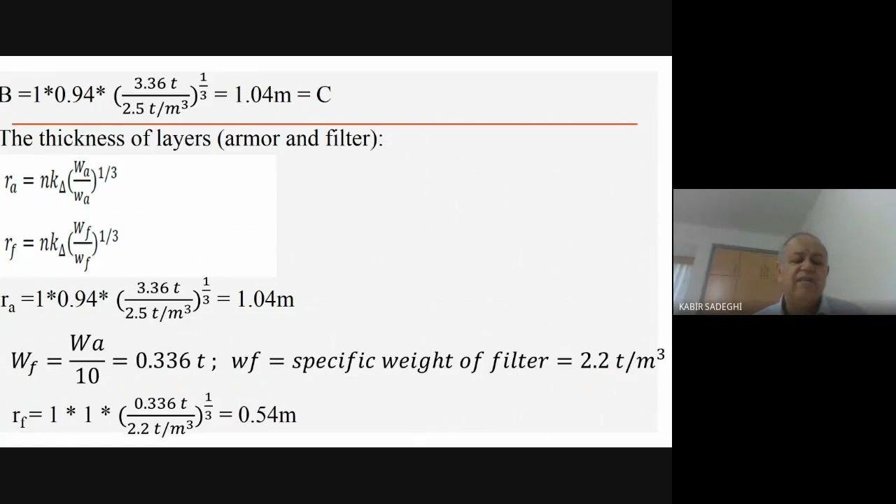And also we found the porosity for estimation of the material. Here we calculated B, the crest width, and then we calculated the RA, which was the thickness of the armor unit layer. We found the thickness of the filter layer, and we found the WF, the weight of one filter stone, and RF, the thickness of the filter layer.

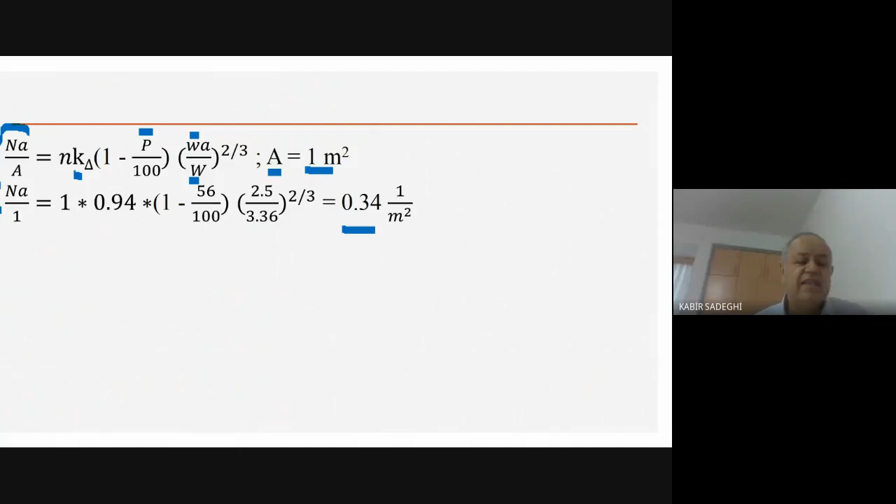We calculated the density of the material placed. How many armors we have on 1 square meter? Or one armor takes how much area per square meter? We calculated that, it was NA. We used the K delta from the same table that we saw, and we used the porosity percentage and the other parameters.

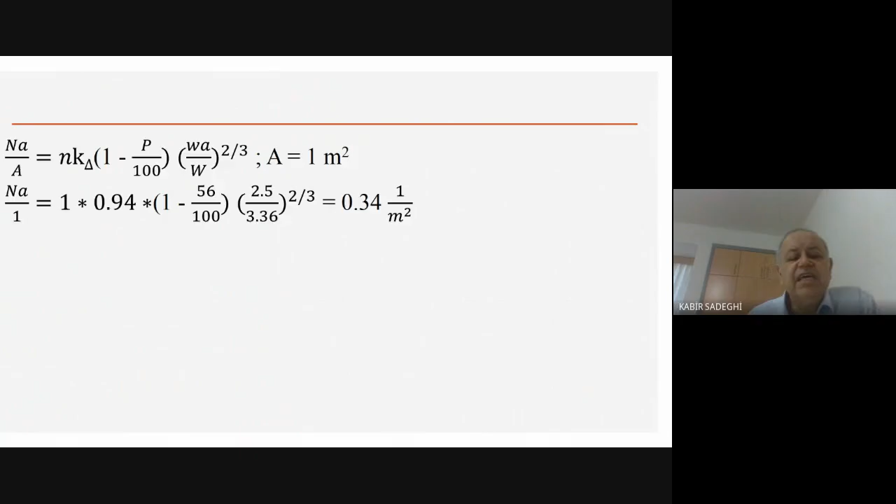And we sketched the section of the trunk. Don't forget, when you sketch, you should give all the specifications: the dimensions, the heights, the angles, the sizes, the weight of each unit. For example, armor unit, filter unit, toe berm, core material, everything should be well defined.

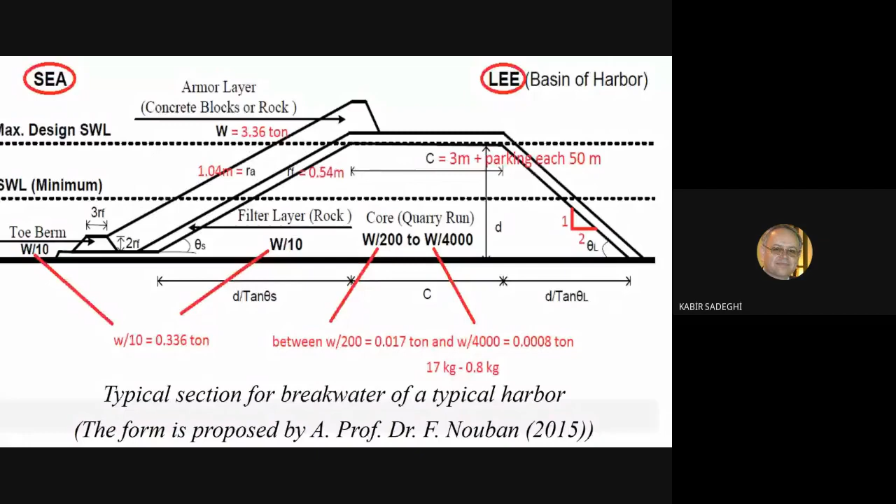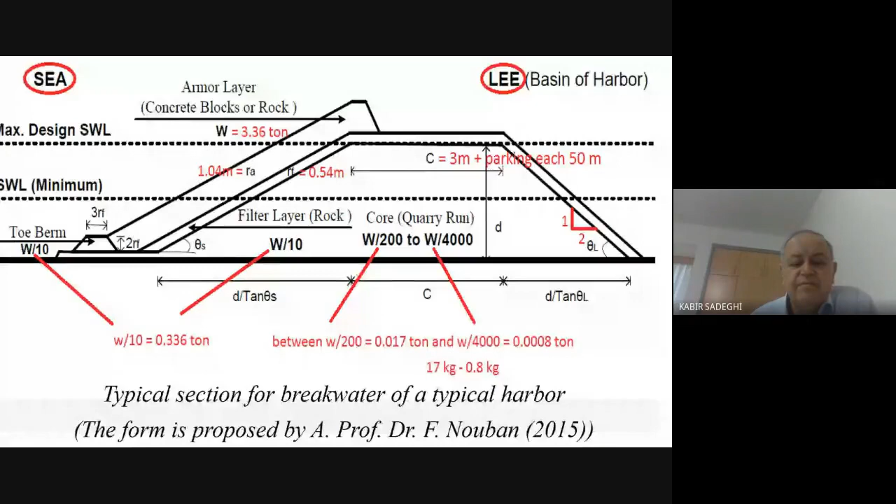In addition to that, the level of the crest of the core, which is fixed to the still water level, that we considered as MLWL, mean... and here let me erase this one.

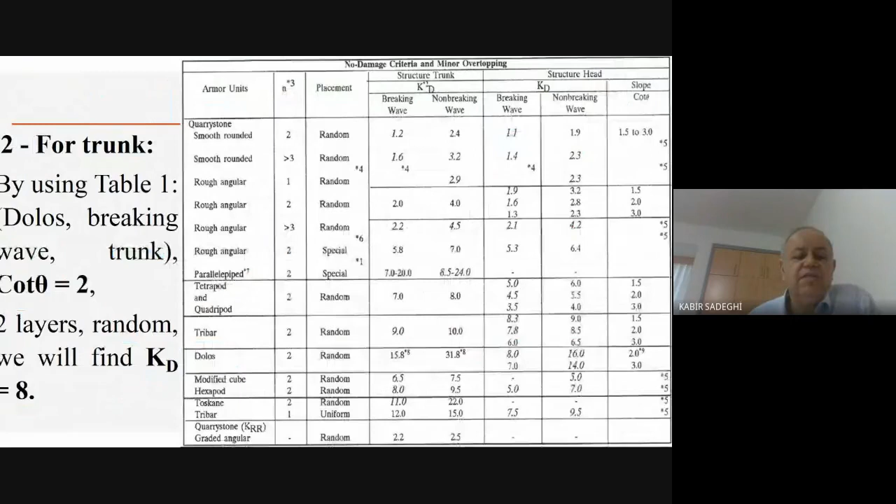For, I told you this is a mistake. It is head, I don't know, I didn't apply the last version of my presentation. And we found a different KD for that. And then we should start from the beginning, calculate all parameters similar to what we did for the trunk.

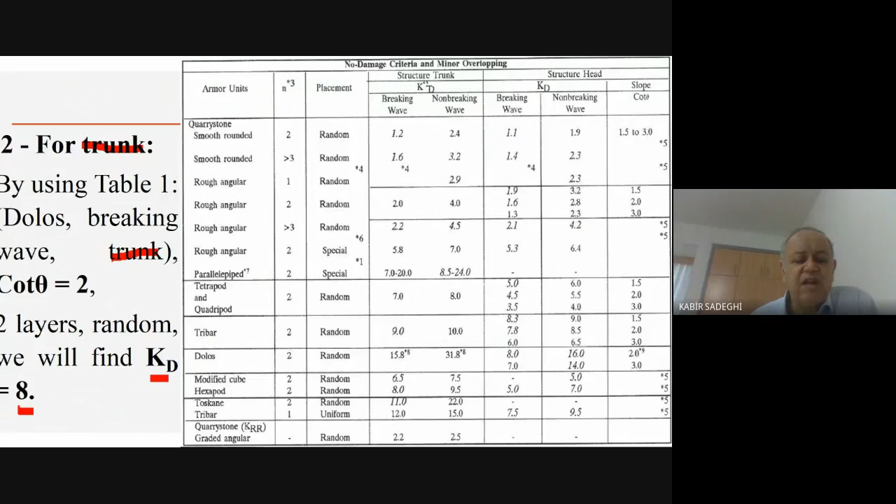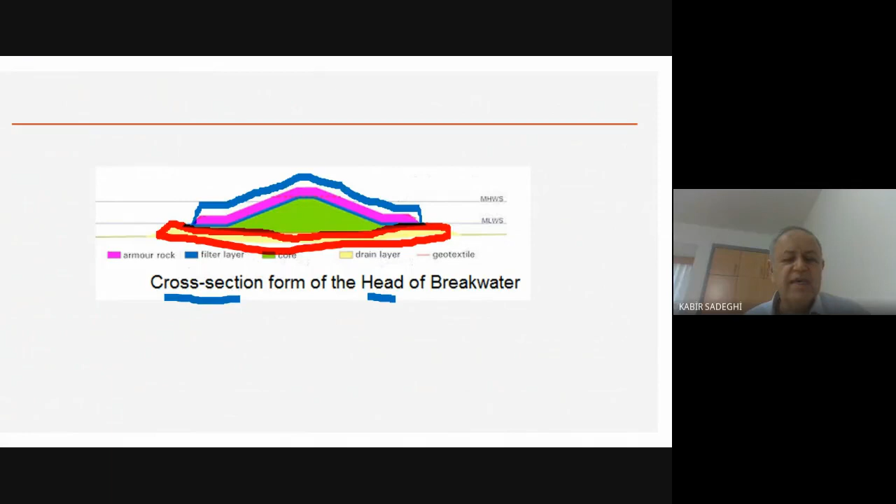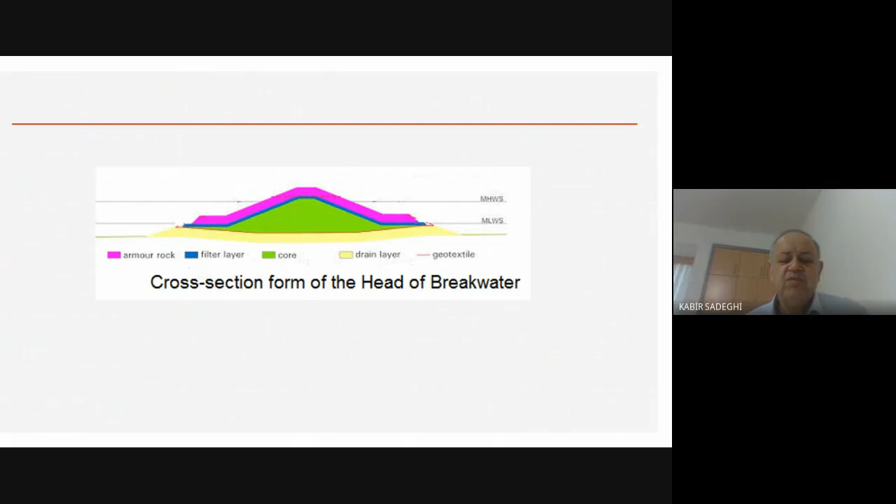I told you this section should be at the head, should be symmetric. We have armor layers on both sides, at lee side and sea side, both sides. And that's all. Therefore, let me see, do you have any question or not? Don't forget, work on paper, because the semester is finishing. I am waiting for that, and search the internet to find more items to understand the course better.